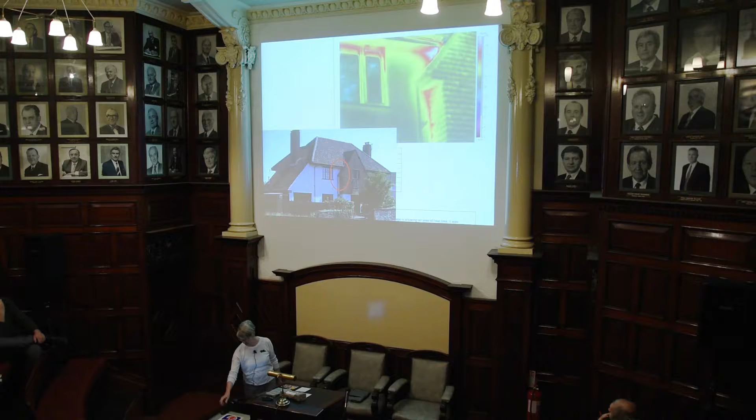You can do internal insulation, which is possibly what people are considering with historic buildings or buildings where there's a nice exterior. Or you can do a hybrid, like we did, although don't do what we did, which is that. Yes. Okay. So this is the undeveloped house, but this is render, and this is a thermographic image of after the works were done. This has got 18mm polyisocyanurate on the outside. I wanted to keep this as a feature, so we internally insulated that with foam-backed plasterboard. What's that thermographic image showing? We didn't do.

Yeah, why have we got a cold bridge? There's no overlap. I know to do it now, but that there is where the internal insulation and external insulation don't overlap. So we have a very big cold bridge.

However, I would really advise you to be very thoughtful when you do internal wall insulation for retrofit, well actually for both, but particularly for retrofit, because you're moving the dew point, you're possibly moving it within the fabric where it's going to cause destruction and deterioration of the fabric. This is a picture of some internal wall insulation which had to be ripped out because there was mould growing behind it.

Historic Scotland was so concerned about this that they actually put moisture meters behind all the trial internal wall installations to see if the moisture went up as a result of the IWI. This is a report that you can get free online. It does actually conclude that there was no significant increase in moisture, but I would say that this was a very particular building, in a very particular climate, with a very particular set of internal wall insulation, so don't take that as read. It's a very serious issue.

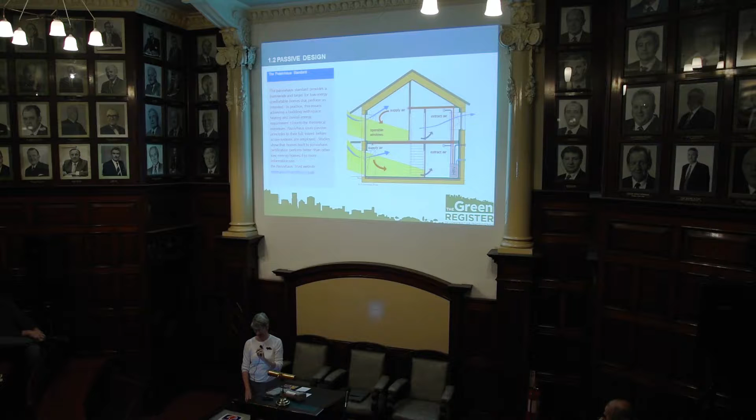I'm going to talk about the Zero Carbon Hub legacy of guides, and they've got one really good one called the Designer's Handbook. You're going to get all these slides so you'll be able to link to it. The Buildings Hub is the legacy organisation of the Zero Carbon Hub, so they both produce documents. But the Designer's Guide talks about passive design, particularly in context of passive house principles. And it talks about thermal mass, which is a very interesting concept to use passively rather than active systems. So do have a look at that.

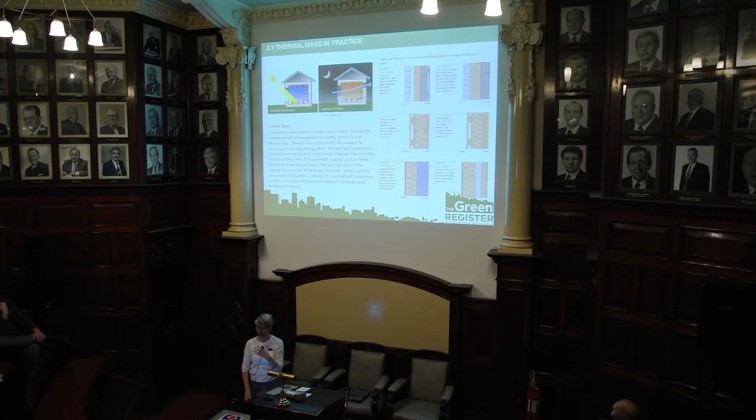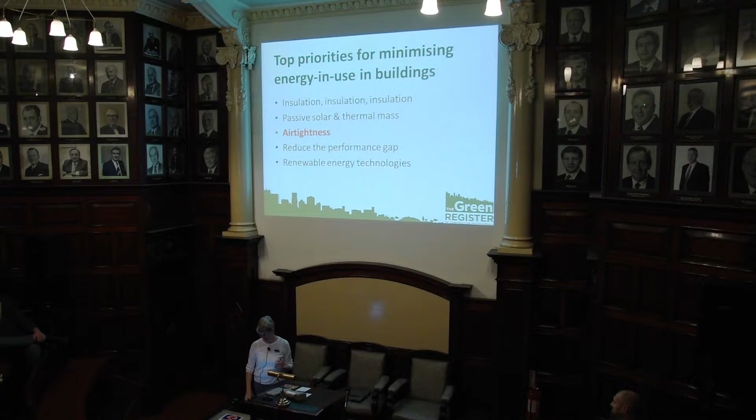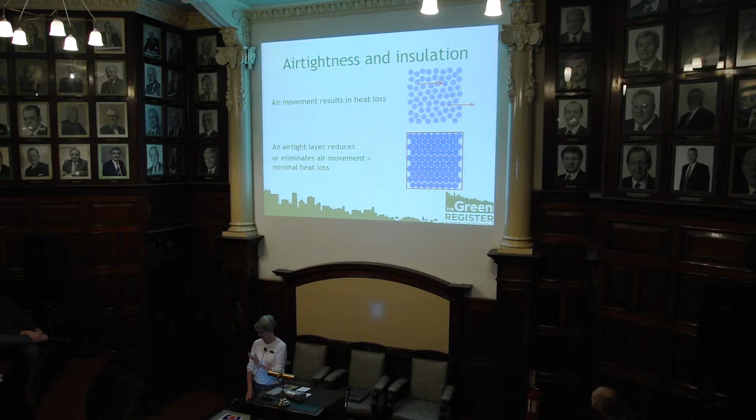Okay, somebody mentioned airtightness earlier. It's drafts, basically. And the principle of airtightness is the same as if you're outside on a cold day with a woolly jumper and there's very still air, you'll be really warm. If you've got a breeze going through your woolly jumper, you'll feel cold. And so the idea is to wrap yourself in not necessarily a big thick jacket, but just something that's airtight and the wind can't go through it. It's exactly the same in buildings.

Many people think that airtightness is not really significant. And this study that was done in Germany shows quite how shockingly significant small gaps are. So they designed a square metre of external wall, 140 mil of insulation, unbroken vapour check, and then they took a Stanley knife and they cut a 1 millimetre gap across the 1 metre surface. The design U value was 0.3.

What do you think doing that tiny little gap, which of course we never ever see on construction sites, did to the U value? What value do you think it resulted in? Take a guess. Twice. Twice. The other way around. What was the number? What was the figure? It's 0.4. 1.6. Who said 1.6? Anybody higher than 1.6? Okay. Factor of nearly 5. Wow.

It acts like a prism. It's a very small gap to lose disproportionate amounts of air, and also moisture, by the way. So if you're doing timber frame, you've got gaps in the breather membrane, that moisture is going to get in and damage the timber. So actually air tightness is massively important, and we don't have robust enough regulations here at the moment. It's 10 air changes per hour, which is a hole the size of a 20p piece every square metre of the external envelope. It's not too difficult to achieve.

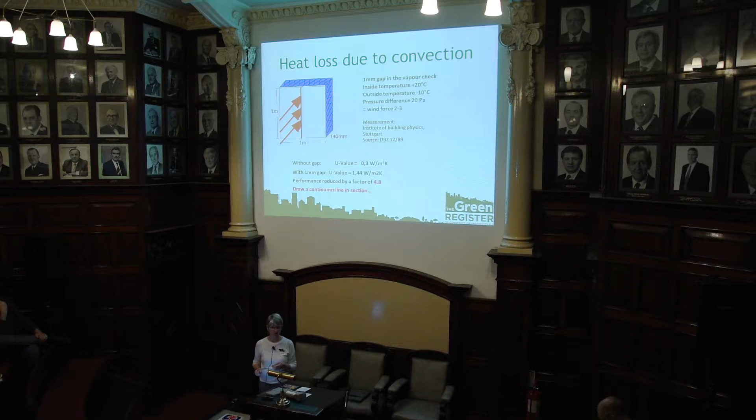The problem we've got as architects is we're often not on site to monitor it, so you have to identify a site champion that's going to look after the air tightness for you. The good news is that we are routinely getting better tightness values. This again is my house, so on the right is how not to do air tightness. This was just before we fell out with the first builder. On the left is my younger brother, who does do what he's told, and he was putting in a breather membrane in the ground floor.

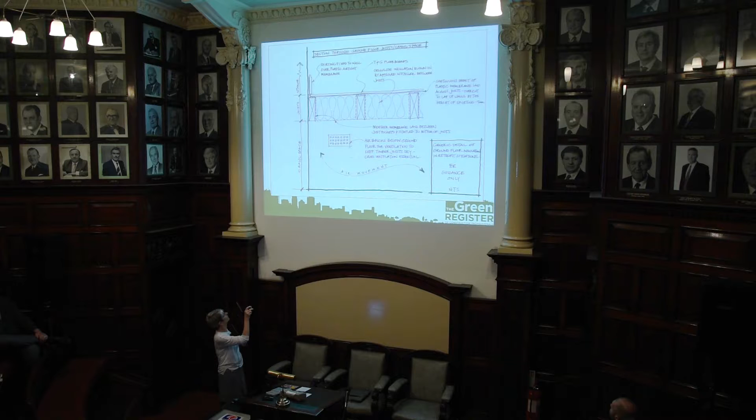And what we were doing is the joists there were rotten because the flower beds had breached the DPC. So we took all the joists out, put a new one in. This is a section, opened up the air vents, and then I thought I was being really clever. I put a breathing membrane around the joists, stapled them to the bottom so they're nice straight pockets, filled it with cellulose insulation, and then I put a plastic layer up and behind the skirting, and then fixed the skirting to the overlap, thinking that's where the problem is. That's where the leakage is going to be.

But actually, in post-occupancy thermal imaging that I've done, there is a problem with that. And why would that be? What didn't we do? No, we did. We insulated the joists. But why would air be coming up where that arrow is? Didn't seal it. Didn't seal it. And what does plaster do below a skirting board? They don't bother plastering it in a nice fashion, they leave it out.

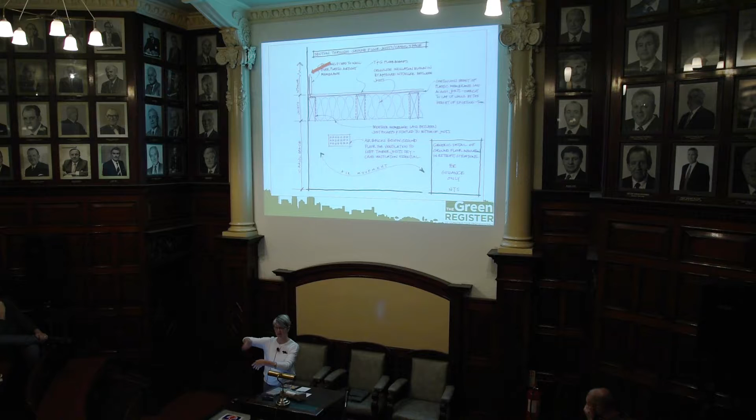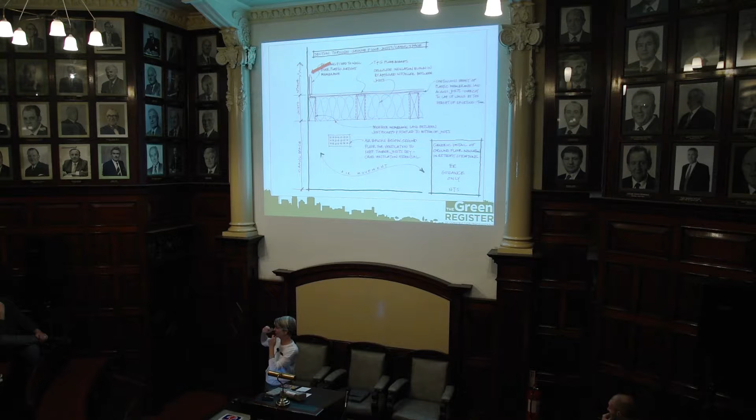So this good idea I had of the plastic going up and being held by the skirting, actually was being held against an irregular surface. So I should have taped the entire top of the plastic. I could not bring myself to ruin all the mitres of all the skirting around the ground floor, so I just put a whole load of silicone there for the time being, and I shall revisit it at some point.

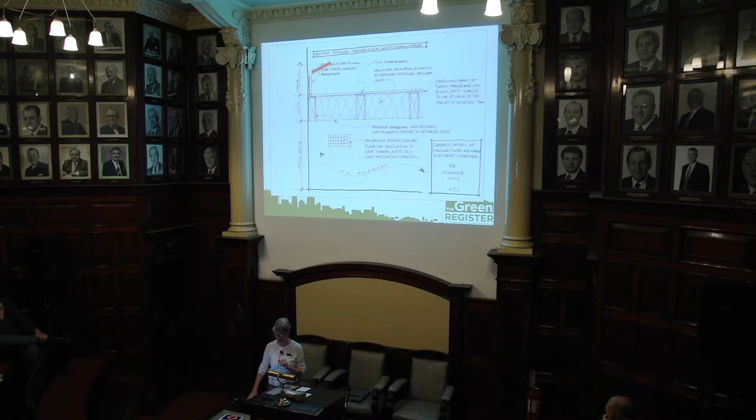So this is what we as architects must do. You must communicate, particularly if it's design and build and you're going to have no site presence at all, and identify where your air tightness layer is. And whether you're using a mouse or a red pencil, if your pencil comes off the paper, that means you've got a gap. And remember what those gaps do to the air tightness. If your pencil jiggles a lot, it means it's a really difficult detail and you have to blow that up and show the contractor how to do it. But we must show the people on site where that air tightness layer is.

Now, on to the performance gap. So, I'm going to show this in terms of energy use. This is using the RIBA plan of work. And I'm going to show you what happens. And the number of times I've shown this to people, most people say, yeah, that happens in our projects too. It isn't inevitable, but it is.

So it's a slightly odd way of showing it. This is Part L compliance here. And above the line is better than Part L, no sorry, below the line is better than Part L, and above the line is non-compliance. So at the beginning, everybody's feeling very positive about the project.

The client says, yes, we want to get a BREEAM standard, maybe we're going to get some funding for some renewables or something. The building modelling says actually we're going to be even better than that. And then by the time you've got a kind of design freeze, you've got a pretty good above compliance, better than compliance building.

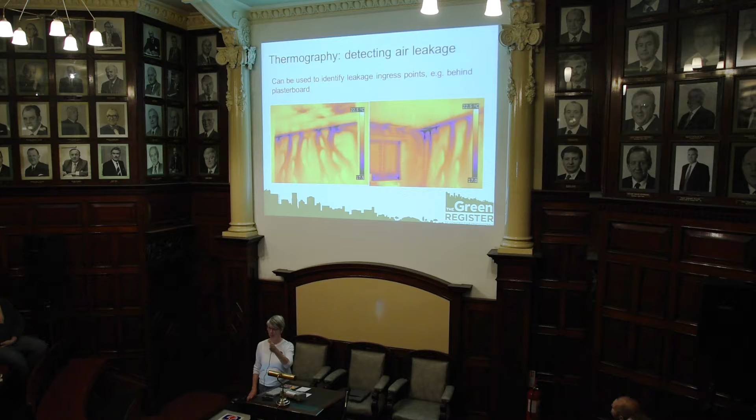The BPE programme was an £8 million programme. I'm not going to spend long on this because it did highlight a lot of problems around the country in terms of build quality. There's a domestic programme and a non-domestic programme. They're all freely downloadable. The kind of things that they were using was thermography to show major gaps here. This is between the wallboard and the ceiling, where there's a huge thermal bridge across that junction.

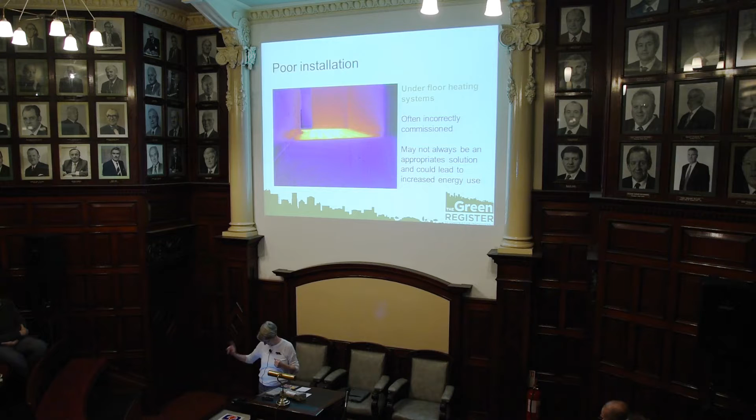This was underfloor heating. The client couldn't understand why the underfloor heating wasn't keeping it warm. Brought in an electric fan heater to try and heat the building. And actually with thermographic imaging, you can see that only one panel of the underfloor heating is working. The rest isn't working. Although I just thought you could actually put your hand on the floor, couldn't you? Yes.

This was another one where it was an overheated building. The thermostat was set at 12, but because it had been incorrectly wired, the boiler was being told it needed to be heated up, and the actual air temperature was nearly 25 degrees. Post-occupancy monitoring showed that and it was easily resolved, but otherwise you wouldn't know what was going on there.

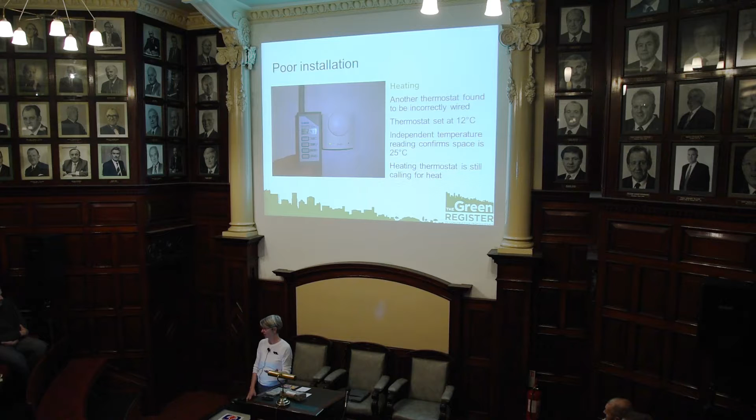Ventilation is a whole other subject which we spent days talking about at the Green Register. There's a hideous amount of poor installations. BSRIA did a study of dwellings. 82% had ductwork incorrectly fitted, undersized fans, insufficient number of fans, even ducts filled with cavity wall insulation. So it's very important for us to try and share what goes wrong, even though it's hard for us to admit it.

Soft landings is a BSRIA programme which goes for several years after the building's been built. The RIBA's got one in conjunction with CIBSE, so you can upload your information, share it and compare it with others. If you're unwilling to author it, that's fine, you can anonymise the data. But we need to share what's going wrong in order to make it right.

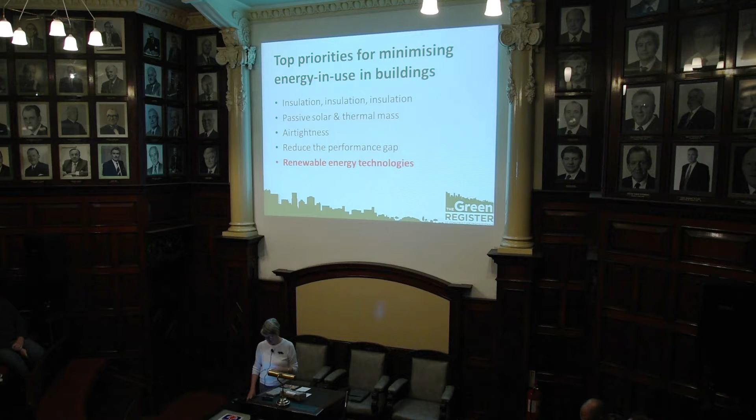Okay, renewable energy technologies. There's a difference between low carbon technologies and renewable energy technologies. Anybody care to just think what that might mean? They're not exactly the same. People are putting log burners in now, and it ticks a few boxes, doesn't it? It does, yep. So that might be what's considered a low carbon technology, or maybe it's renewable. Depends where the wood's coming from.

Not all technologies that save carbon are renewable. So our colleague was talking about LED lighting, fantastic. You know, a tiny tenth of the amount of energy that halogen lights use, same light quality these days. So it saves a lot of carbon, but it's not renewable. Gas condensing boilers, they're not particularly sexy, but they are actually very efficient with the amount of gas that goes in. Up to 95% of the energy that goes in comes out as useful energy.

Not all renewable technologies save carbon. Air source heat pumps is a very good example. It's just a fancy way of using electricity, and if you don't have a coefficient of performance of at least 3, you might as well be using gas. It's all relative though. All technologies have some kind of carbon emissions. Very simply put, those 3 are low carbon technologies but aren't renewables. So the time I've got left, this is going to be a bit whirlwind.

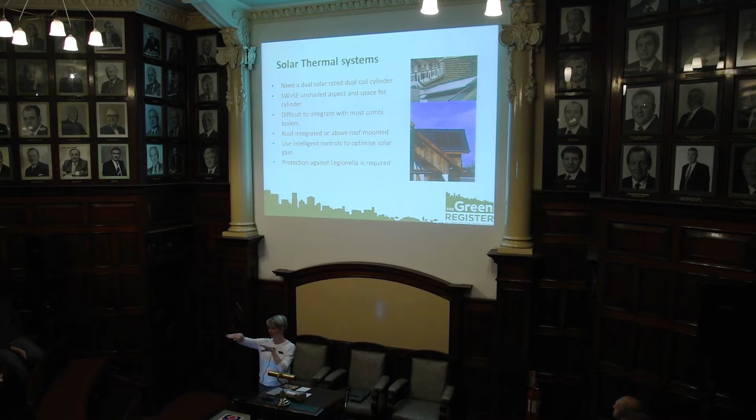The thing I want to point out is, if your client's interested in using solar panels, there's 2 types of solar thermal. One is a flat plate on the bottom, and the one on the top is called evacuated tube. And the beauty of that is, particularly if you're retrofitting, evacuated tubes have a little fin inside with a pipe running through the middle, and you can tip the fin towards the sun. So if you haven't got an ideal south-facing roof, you can tip them towards the sun.

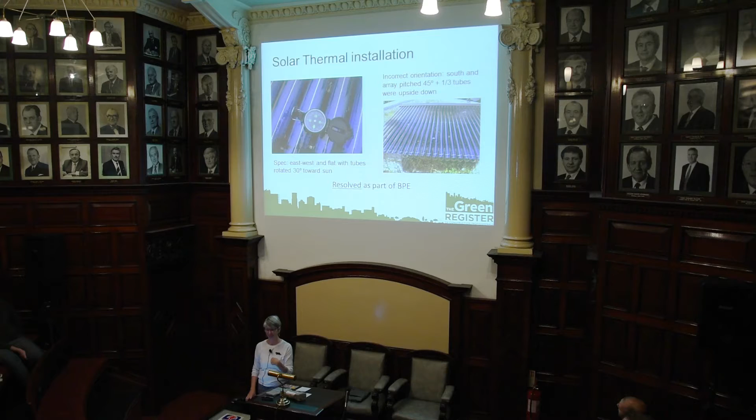Another thing that was found out with the building performance evaluation was that in this particular case of evacuated tubes, they were in the wrong place, in the wrong orientation, and a third of the tubes were actually upside down. So, good to check.

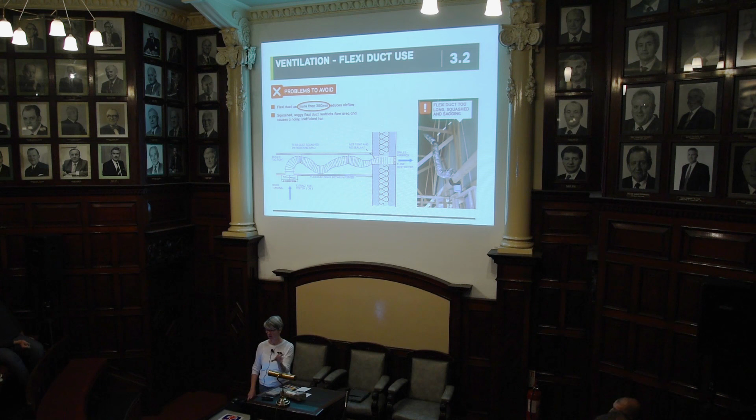I'm sorry, I don't have time to go through all this. But do have a look at this. This is the Zero Carbon Hub Services Guide. It's got lots on overheating. A really good section on ventilation too. I was mentioning how poor installations are. These are the kinds of things not to do. No more than 300 mil of flexi duct. It's got to be rigid because it increases the resistance of the air and so on. Lots of really good practical solutions you can find, all free to download. I very much encourage you to take a look at all those guides.

And so to finish, the future isn't dark, it's not full of coal, it's full of the sun. Thank you.